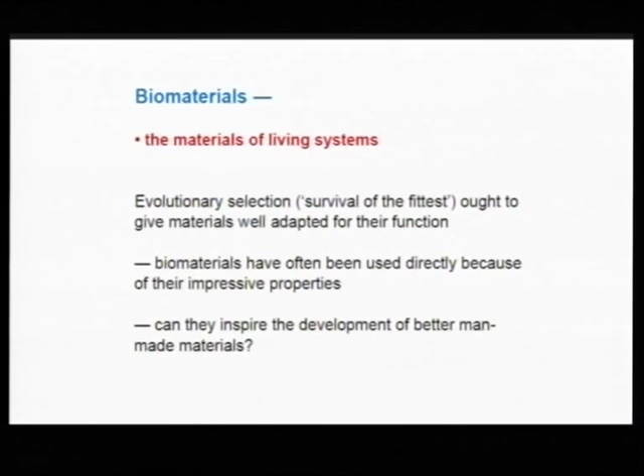As we have progressed, we have tended to move away from those natural materials. You see more man-made materials like steel. But maybe now we're rather moving back to those earlier materials to draw some inspiration from what they had to offer. So we'll see what we can do in this regard.

And we're going to start with a tree. Our problem for you is to think about the tree not as a biological structure, but just as an engineering structure. So imagine you are an engineer and you are given the job of selecting the best structural material from which to make the tree.

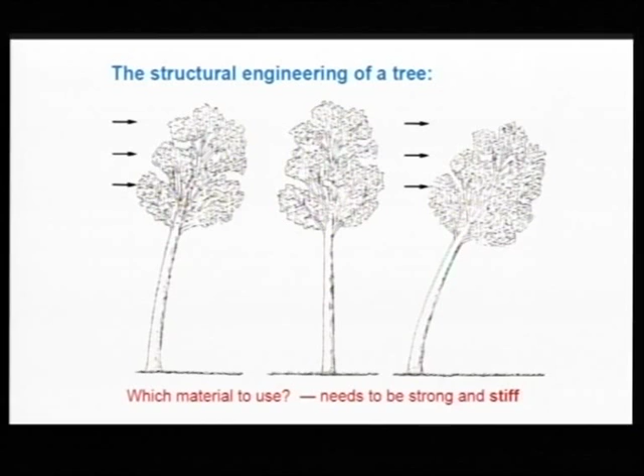You know roughly what you have to do. The tree has to stand up. It must be reasonably stiff to resist moving in the wind. How to choose the best material?

Well, we need some way of measuring the properties of a material. Let us imagine a very simple component, a cylindrical rod. It has some length L. We put some load or force on it to make it longer, and we measure how much it gets longer by this extension delta L.

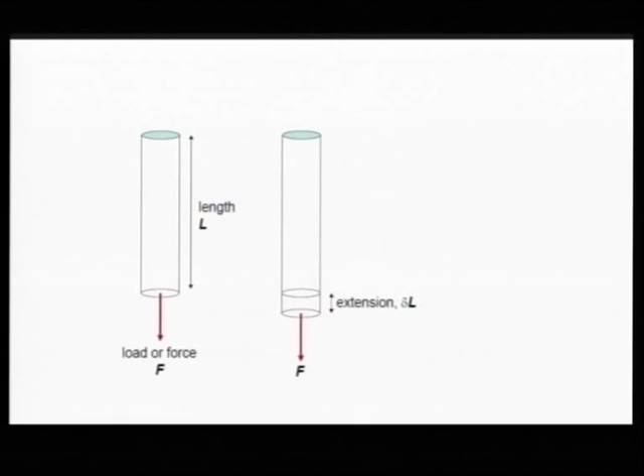You already, of course, know the next point in my argument, which is that F and delta L have a linear relationship with each other. And you can look at the gradient of that line, and that's a property which we could call the stiffness.

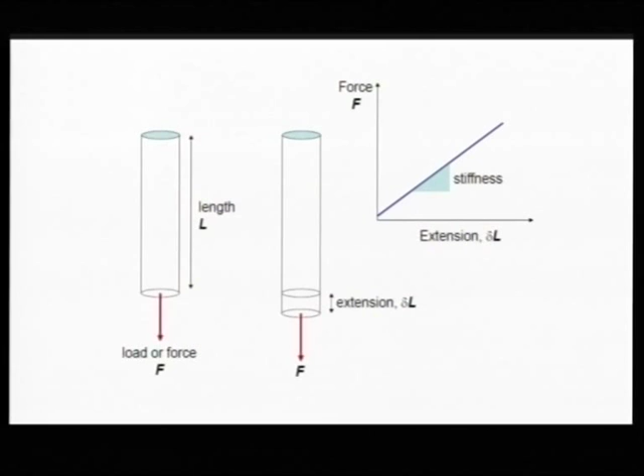But that is not very good for telling us the properties of the material out of which this rod is made, because unfortunately that stiffness depends on the dimensions of the rod itself. If I made the rod twice the diameter, it would be much more stiff. And we don't want to measure that. We want to measure something that depends on the material, not the size and shape of this object.

We note that this is reversible. That's good. We'll be exploiting that elastic property. And here's the point I've been making, that reversible or not, the property we've got is dependent on the size. How to get away from that? Well, it is to change these properties.

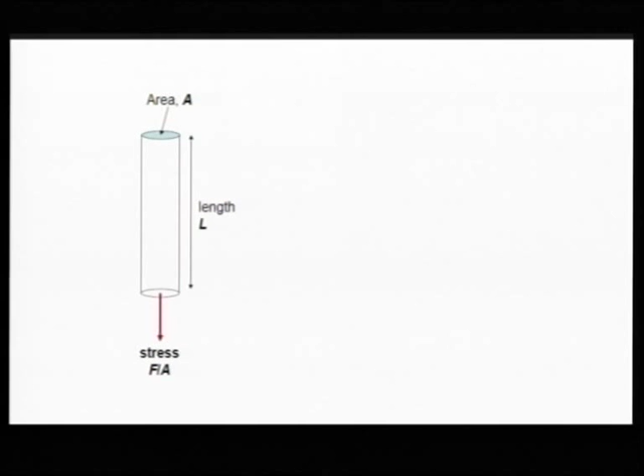So instead of looking just at the load, you divide it by the area to get a property called stress. And instead of extension, you divide the extension by the original length to get a property called strain. And now we plot those against each other.

It's really the same plot as before. We again have a straight line showing that reversible behavior. But now the gradient of that line is a property called the modulus, the Young's modulus E. And that is a property of the material, not of the particular component.

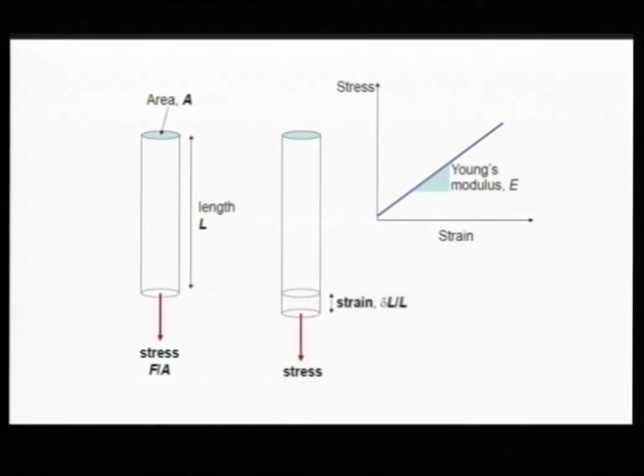So that property E is something we can use to tell us whether a material is better or worse for some function. It's a material property.

Back to our tree. A branch on a tree has the function of holding the leaves out in the sunshine. It must not bend too much under its own weight, and it must not bend too much in the wind. So it must be stiff, it must have a high Young's modulus. And of course, it must not be too heavy to bend under its own weight, so it should have a low density, weight per unit volume.

We can analyze the amount of bending that it would undergo. We need not worry too much about all the mathematics. The point is, if you have a beam, like this yellow object here, with a force on the end, as a result of that force the beam shows a deflection, which is this quantity I've called delta.

We can look at what determines the magnitude of delta. It's this expression, with various parameters of our beam. We'll focus just on delta itself and on this combination of parameters at the end, which is the density of the material, rho, and the Young's modulus E, in this particular ratio, the square of the density over the modulus.

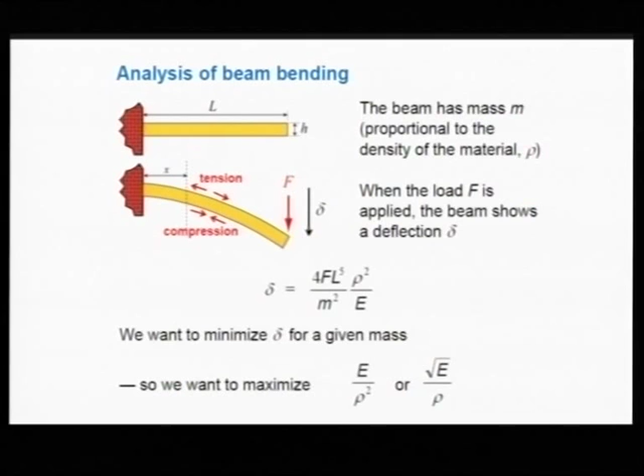So in building our tree, we wish to have this deflection be as small as possible. Delta must be small, which means this combination of parameters must be small. Turning it the other way around, this must be as large as possible. You could express it this way or this way.

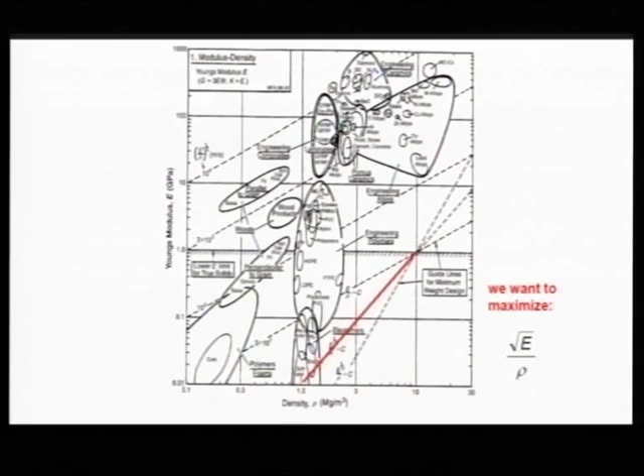Here's what we want - this line is interesting. If we go from this end to this end, our density goes up by a factor of 10, and our modulus goes up by a factor of 100. So in terms of this ratio, E has increased by a factor of 100, the square root is obviously increased by a factor of 10, and the density is increased by a factor of 10. So this is constant - this is a line of constant value of this ratio.

That line is, of all the positions on the diagram, as much towards the bottom and to the right as possible, and that's the worst place to be. So the material it indicates should be the worst possible material to make a tree out of. And that material is, in fact, soft rubber - the material of a rubber band you might use. You can understand that making a tree structurally out of rubber band material would not be very successful.

Here's another very bad material, the metal lead - rather soft, rather heavy, not a good material to make a tree out of. As it happens, steel would be quite a good structural material for a tree. Of course, you know that aeroplanes are not made out of steel, they're mostly aluminium. Aluminium is a little bit better than steel - that red line is a little bit further towards the top left, where we want to be.

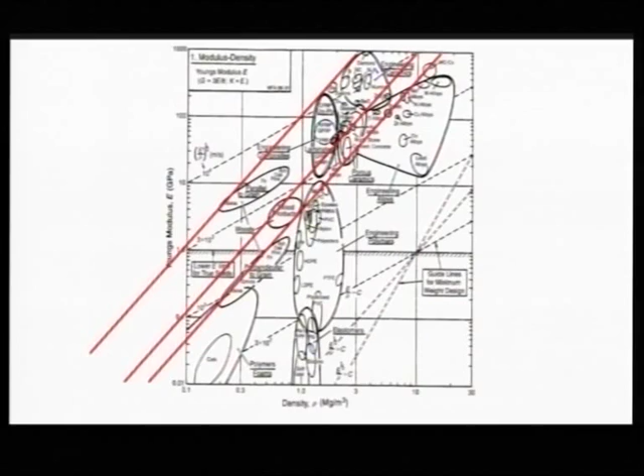But interestingly, of all known engineering materials, the best one is indicated by that line, and I have to tell you that is wood - it's in fact balsa wood here. So it means that if you ignored all the biological functions of the tree and simply asked, what is the best structural material to build a tree? The answer is wood. So nature got there already, and it's one example of evolutionary selection giving us something that's well adapted for its function. Wood is the best material to use.

This idea of evolutionary selection was, of course, made famous by Charles Darwin, who's one of the alumni of my university.

It can obviously have strong effects in other systems as well, but let's look a little bit at wood. It consists of cells, which are cylinders. You might regard them as rather like my pen, but longer in relation to the diameter, and most of them are aligned with the axis of the tree, up and down.

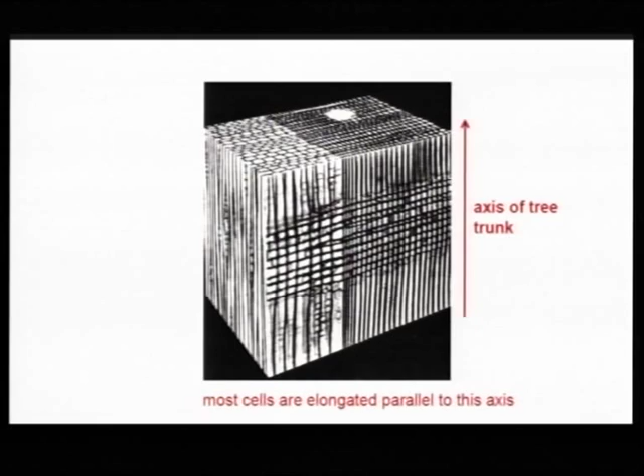But imagine the tree was composed only of cells like this, parallel to each other, with nothing linking them. The tree would be very weak. You could bend it easily and the cells would bend out of shape. So you must hold it together. If this is the main axis of the tree, the radial directions have a set of cells holding the main ones together, and that is these ones.

Here is a cross-section of the tree. The vertical cells are very obvious, and the radial cells are the ones holding things together. Interestingly, if you just look at the surface of this tree, there are no cells parallel to the surface. The vertical ones are there, but not the others. So to split wood that way is extremely easy. It's very weak in that direction.

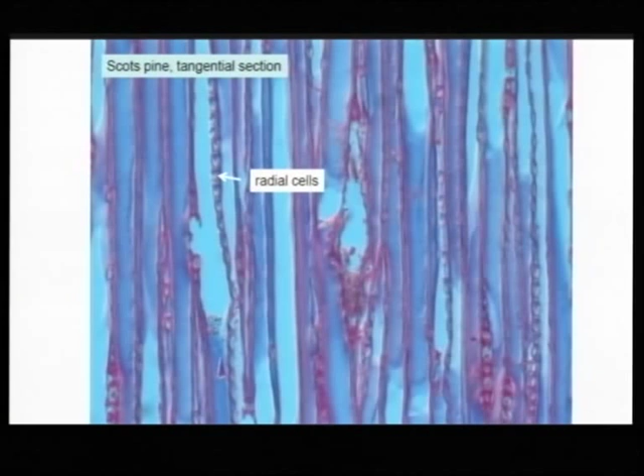This is common wood, Scots pine. These are the cells parallel to the axis. These little things look like peas, but they're actually the ends of the radial cells coming out, holding everything together. It's a wonderful engineering structure.

This is one of the hardest woods known. Greenheart is the name in English. This wood is exceedingly strong, with essentially no free volume in it. It's completely dense. In fact, the overall density of the wood exceeds 1, so this wood will not float in water. It will sink.

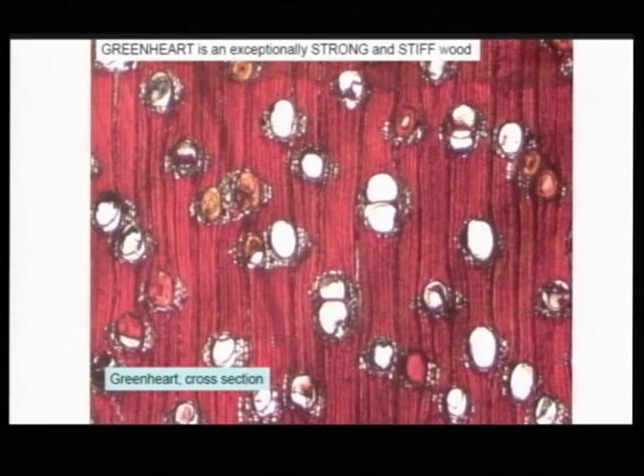Interestingly, it's in the same classification of hardwood that you find the very light material balsa, which is more than 80% air in its dry condition. But it's a wonderful example of a light, stiff material from which we could draw many structural lessons for man-made materials. So back to our idea of people living in caves, maybe 50,000 or more years ago.

Here's a chart again of properties. This is density, factors of 10, strength, factors of 10. But the real point of this chart is to show you the range of available materials. And I mentioned that some of the most interesting materials were natural materials. So we find here wood, shells, antlers of animals, very impressive properties.

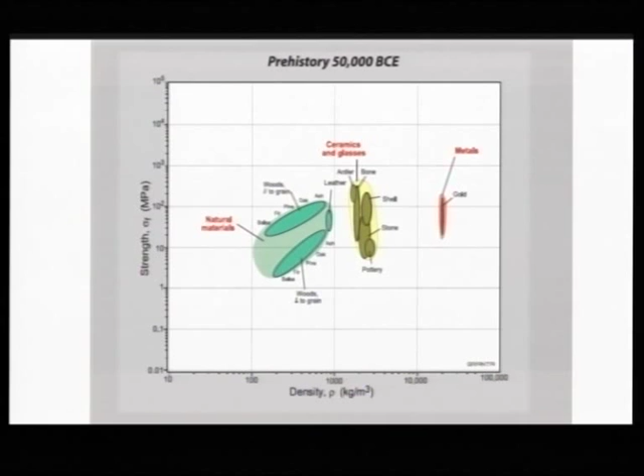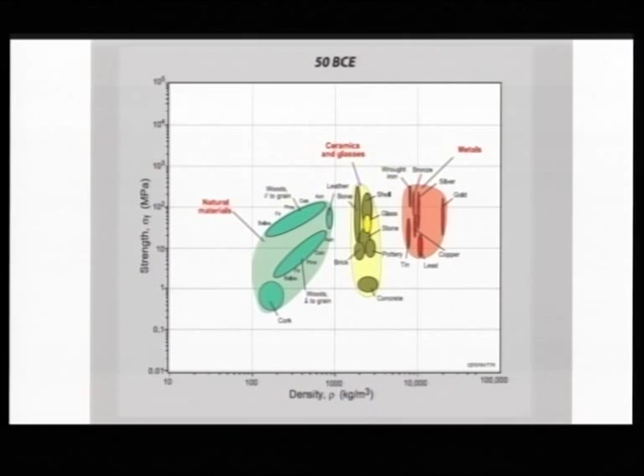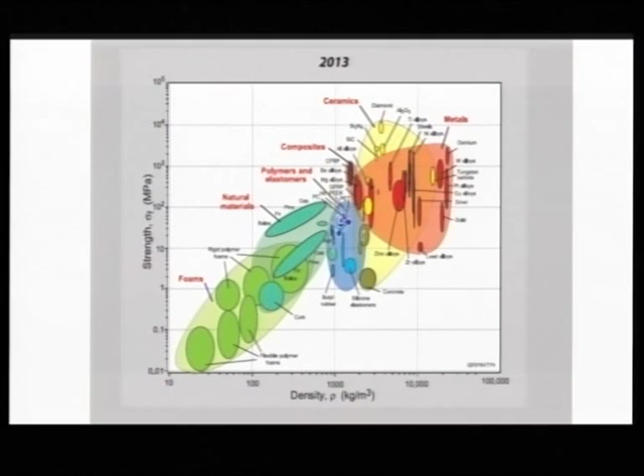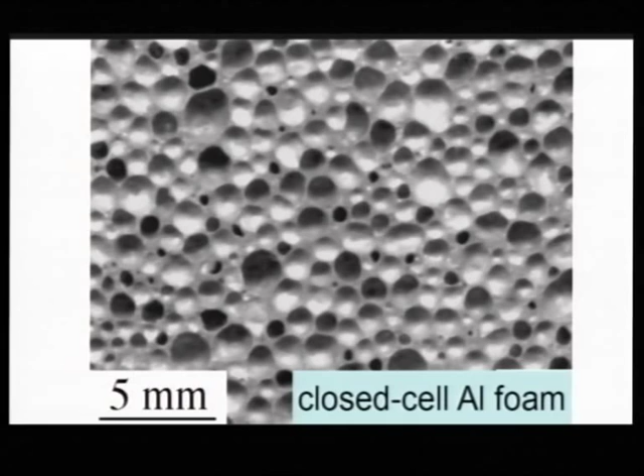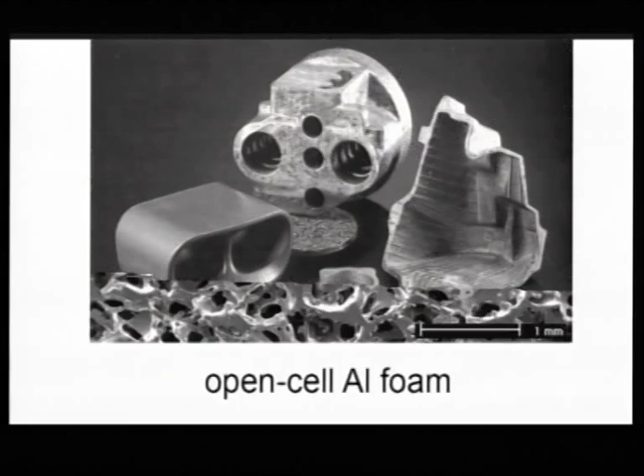So you can develop metal cellular systems. The cells could be so-called closed, with bubbles inside the system, making it low density. Or those bubbles could link with each other, giving you a so-called open cell foam. You could imagine that a liquid could travel through that, so you could use this material as a filter. These are examples of components made from foamed aluminium. They're light, stiff. Here are filters from nickel.

Another point to make about these materials is not just that they provide inspiration in terms of properties like strength and density, but in other ways also. The tree only ever exists in the natural temperature that it finds at the surface of the Earth. It doesn't have any high temperature processing at 2000 Celsius or something. So the energy input to make a tree is minimal compared to the energy input to make a man-made material.

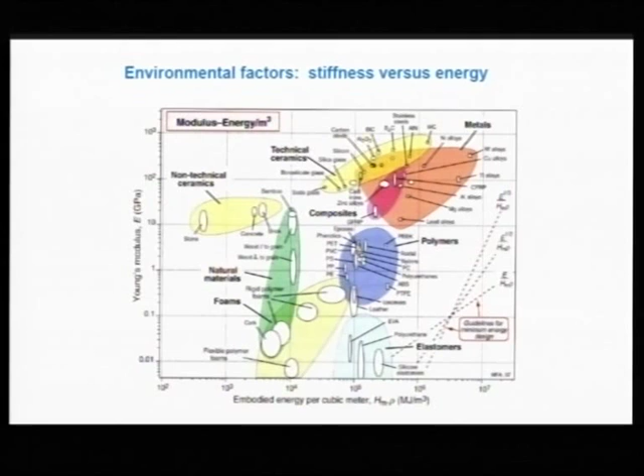This is a chart of one property, namely the stiffness, the Young's modulus of a material, as a function of energy input. For energy input, you could think of how much oil you have to burn to make the material, or how much CO2 is put into the atmosphere. In any case, high energy is a bad thing, and low energy is a good thing. These natural materials, particularly the woods, can deliver very high performance in terms of properties with exceedingly low energy. That's characteristic of the natural materials, with very low energy input as well. So you get performance with low environmental impact.

We'll now turn to a completely different world, the view of the spider, which would like to attract some food in the form of flies. Of course, when the fly comes into the spider's web, from the spider's point of view, it would be a disaster if the web was to break. The web must be strong enough to receive the impact of the fly, so it must be good at absorbing energy.

So we can come back to our chart where we looked at Young's modulus, where we had stress and strain, and there's this linear reversible relationship. The gradient is the modulus, and the modulus is a property of the material. If you stretch the fiber, you put in energy, you do work, you can let it go back to its original length, the work comes back. The amount of energy is the area under the curve. It's this triangle, this pale blue triangle.

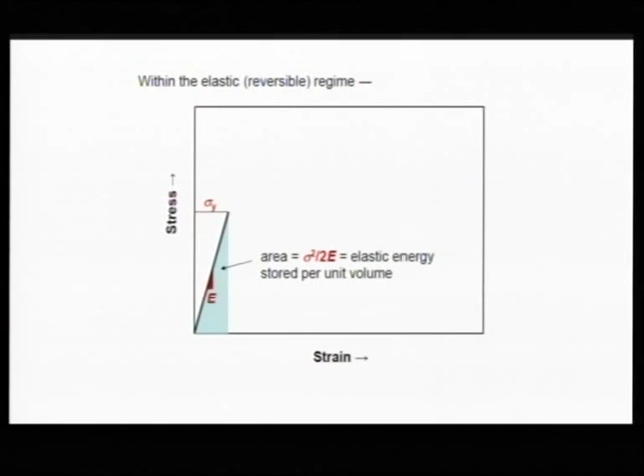And quantitatively, that area is given by this expression. It's the square of the stress you reach divided by twice the modulus. So we know what we have to do if we want, like the spider, to maximize that energy. The first thing is you want to make the fibers stronger so you can stretch them further. So we increase the stress. That obviously increases the area of the triangle and the energy.

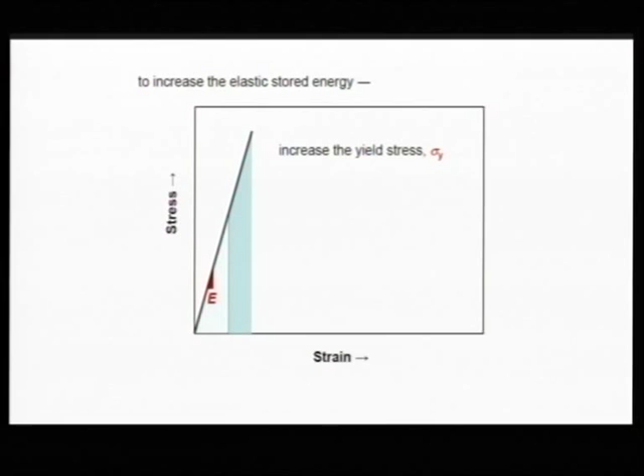The Young's modulus is more difficult. I think if I approached you with a question about a spring and I asked you if the spring is to store more energy, should you choose a material with a high modulus or a low modulus?

Well, the natural answer would be to say high modulus. But actually, what you want is to do the opposite. You want to decrease the modulus, because by lowering the gradient, you of course get a greatly enlarged area, which is the energy. So we know what we want from the point of view of the spider.

Does the spider actually pay attention to this? Well, yes, it does. When the spider makes a web, it has two types of thread in the web. The ones that are radial are those straight lines you see top right. They need to be stiff because you want to hold the web in place. And then the other ones, which form a sort of spiral from the center, are the so-called capture threads. Those are the ones that are going to be used to catch the fly. You don't want those to be stiff. You want those to absorb lots of energy, so you want a low modulus.

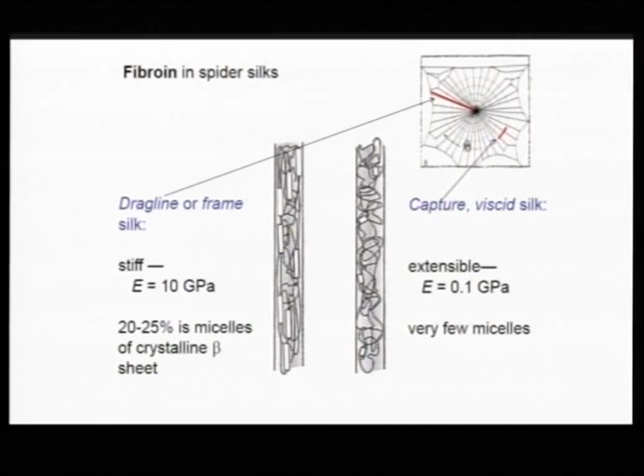And with exactly the same chemistry of all of these threads, the same chemical composition, the spider manages to make threads for the frame that have a modulus of 10 gigapascals, and for the capture lines, a modulus of 0.1 gigapascals. In other words, a factor of 100 difference in the modulus is engineered by the spider for this purpose. It achieves that by allowing the polymers here, the long chains, to be more or less independent of each other, whereas here they're linked into crystalline structures bound locally to make the overall material stiffer.

So here's the web. These are the stiff lines of high modulus, 10 gigapascals, and these are the capture lines of low modulus at 0.1 gigapascals. In fact, if you look at those capture lines up at the top, you'll see that they are not straight. They're hanging under their own weight, so low is the modulus. They're stretching under their own weight.

So, of course, we need to look at one of these charts. We know what we want to store energy. We want a high strength. And we now know that we want a low modulus. So we want, on this chart, to be as far as possible towards the bottom right.

Well, here's a map of all the materials that nature has available. Here's the relevant line of the gradient we have. And by now, you will, of course, not be surprised to find that of all the available materials, nature has chosen the best one. This is, in fact, the silk from a spider's web capture line, which has the best combination of properties of any of the natural materials. It's significantly better than anything else.

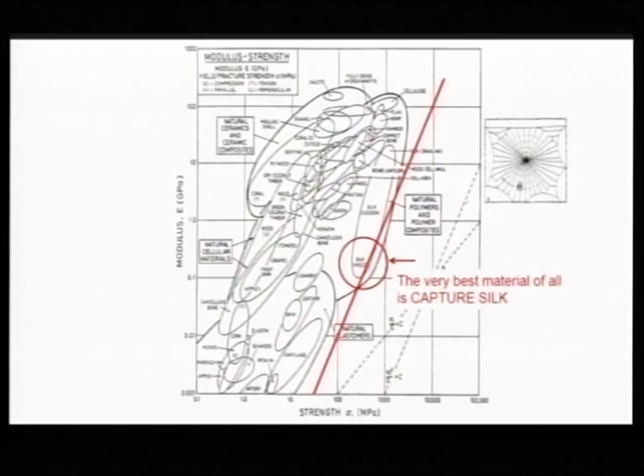We've talked about absorbing energy, but the fly does not wish to provide a sporting or entertainment opportunity for the spider. From the spider's point of view, it would be bad if the fly comes in and then bounces right out of the web like a trampoline. So it's quite important that the web absorbs the energy and does not return it. Well, the spider has sorted out that problem as well.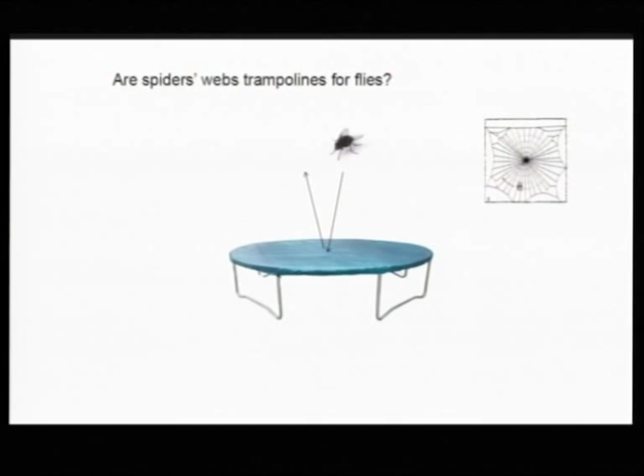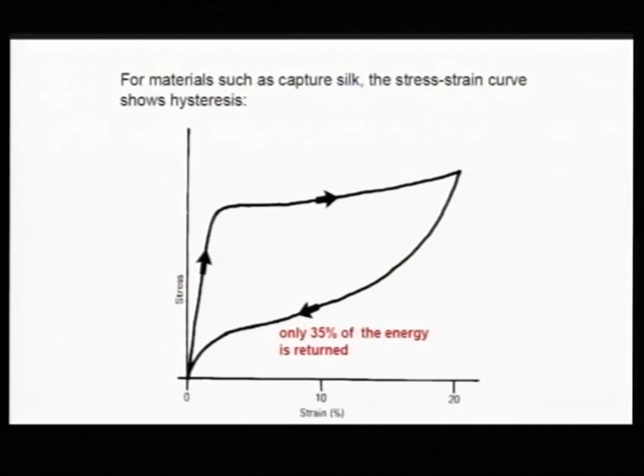Your normal elastic curve is linear and completely reversible. This is not - this is the curve for such a web material. On loading, you follow this curve. Remember, the energy is the area underneath, so there's a big area. On unloading, it follows this other curve, and the area underneath is much smaller - in fact, only about 35%. So it means, yes, the web does return elastically, but it only gives back about a third of the energy.

Two-thirds has been absorbed. It achieves that by changing the structure as we go round this loop. We do go back to the starting condition, but it changes its structure to avoid acting as a trampoline. The structure changes between two forms called beta sheet and alpha helix. We need not worry about the detail, except you can see those two structures look rather different, which says it's not so easy to change from one to the other - which is exactly why the elastic curve has the behavior that it does.

The modulus is controlled by the amount of cross-linking, and that's important in governing the different types of thread in the spider's web. Let me just stay with the comment on spiders' webs for the moment.

If they're extremely good at absorbing energy, you could think of a completely different area of application. Think perhaps of an aircraft carrier, and planes have to land on the carrier, and you need a so-called arrestor cable to stop the plane. The function of that cable is to absorb the energy of the landing plane. So we can ask the question: would the material of spider's web be a good material for these arrestor cables? The answer is yes, it would be rather good.

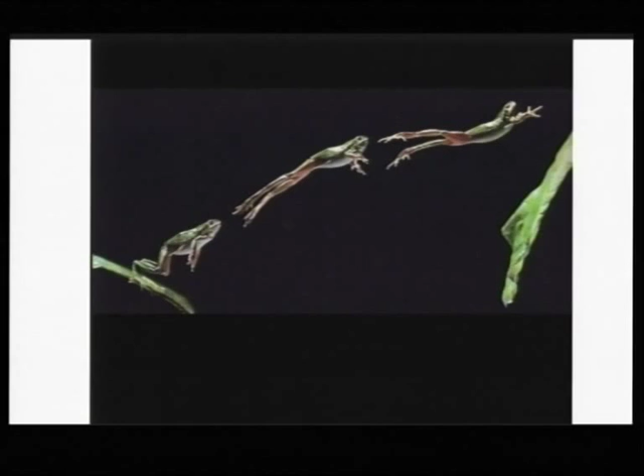Our last topic takes us again to a different world - namely the world of the frog. This particular frog, if you like, carries a Canadian passport. It lives in Canada and is possibly the cleverest frog in the world. It solved a difficult problem, this frog.

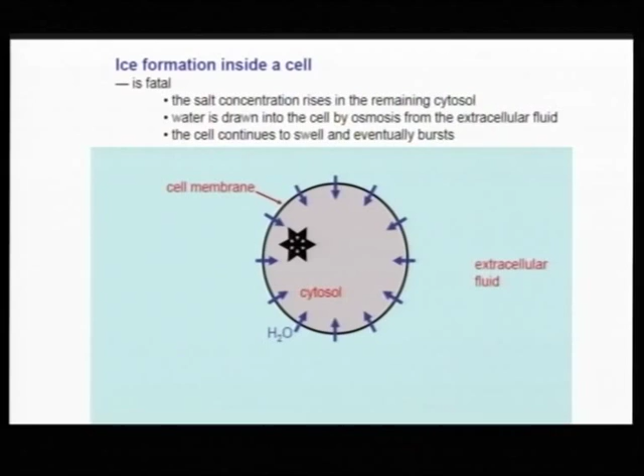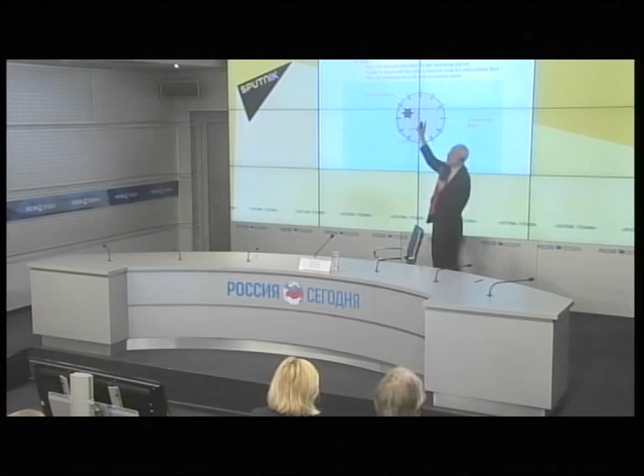Living tissues, plants or animals, do not survive freezing, and the reason is rather simple. You have the living system composed of cells. Here is a schematic of a cell. The cell, of course, is a bag of water with a membrane around it. Inside it is not pure water, it's a salt solution. Imagine that you start to grow some ice inside the cell. Here's the ice crystal - the ice crystal, unlike the liquid, is essentially pure H2O. So the salts in the liquid are now more concentrated than before.

Previously, the liquid inside the cell was in balance with the liquid outside in terms of salt concentration - so-called osmotic balance. But if we now make this salt concentration higher, the osmotic balance is destroyed. The cell will absorb water from the outside by osmosis through the membrane. Of course, drawing in water from the outside simply allows the ice to grow even bigger, which draws in even more water. So the cell will just keep getting bigger and bigger and will eventually rupture the membrane. It will burst, and then the cell is dead - you've destroyed the biological structures.

And for our friend, the frog, this is a difficult problem, because the frog made a very bad life choice - it decided to live north of the Arctic Circle. So in the winter, this frog has no choice. It will freeze - in fact, it freezes completely solid. It cannot avoid the formation of ice. And yet, in the spring, the frog thaws out, the ice becomes water, and the frog hops back to life.

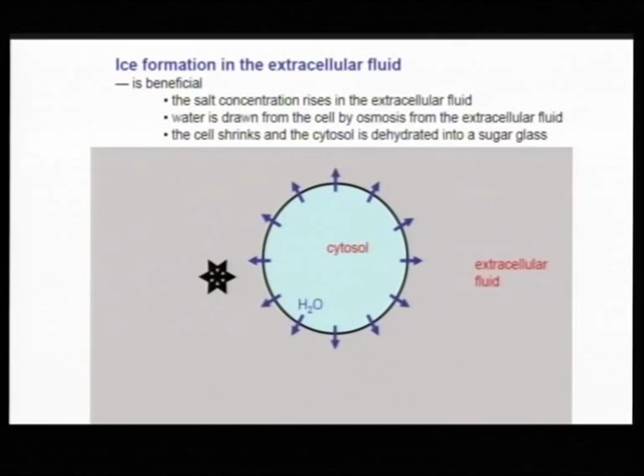And you make the grape more dry. It shrinks and forms a raisin and gradually becomes hard. So what was liquid, more or less, inside the grape becomes a solid. It actually is a solid glass. It's not crystalline—the viscosity gradually increases and you form a glass.

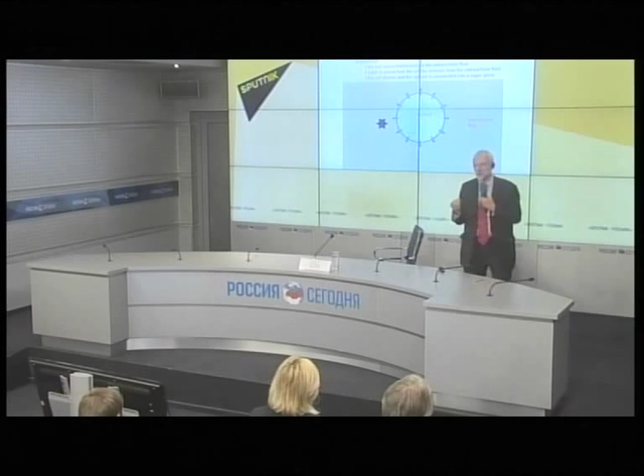In the actual cell of the frog, the water doesn't just have salts in it, it has quite high molecular weight sugars, and it's rather similar to the consistency of this raisin that it would form when it shrinks on drying. Of course, come the spring, this ice turns back to water, the cell absorbs that water, and what doesn't happen easily with a raisin—your raisin goes back to being a grape again. You rehydrate the system. You have not destroyed any of the biological structures, and so the cell, in effect, comes back to life.

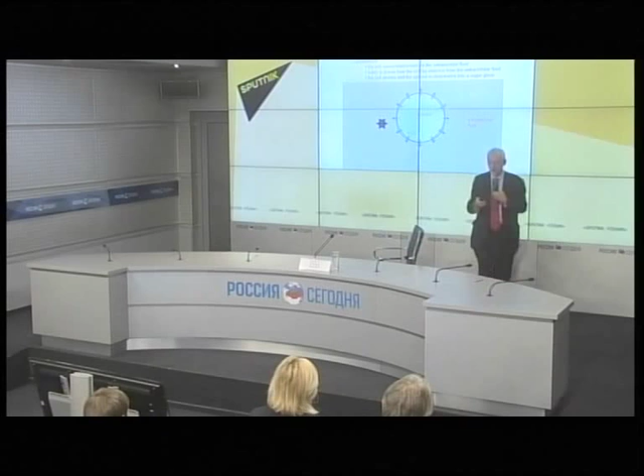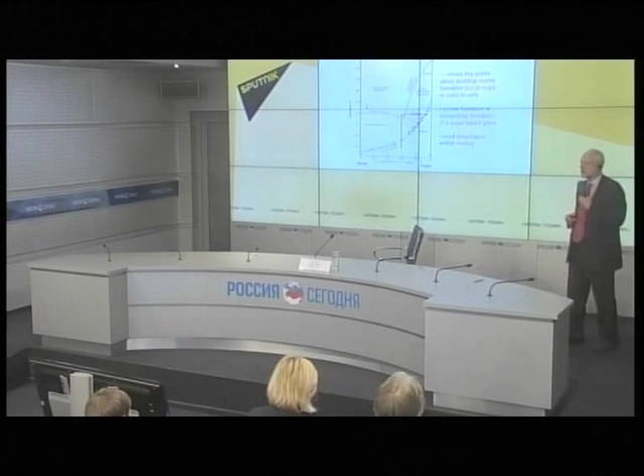We normally think of making a glass by starting with a liquid and cooling it. If there are any metallurgists in the audience, they will recognize a phase diagram. In the diagrams that metals people normally meet, this would be one metal and another metal mixing with each other. In this case, the two things mixing are water and a sugar—in this particular case, sucrose, but in fact it doesn't matter, it could be any type of sugar really.

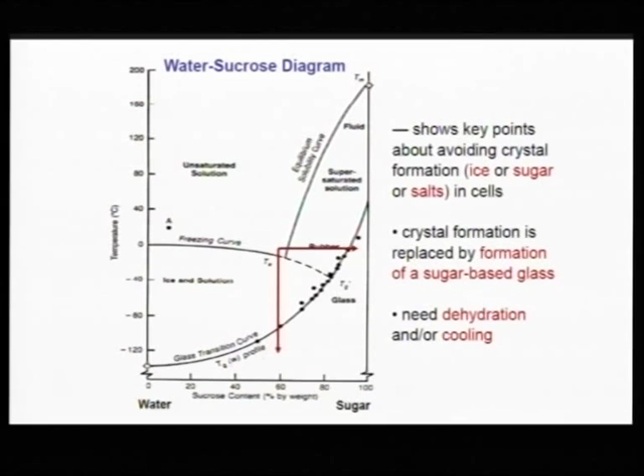The vertical axis is temperature. On the left-hand side, we have pure H2O, which at high enough temperature is water. We cool and it freezes to ice—water cooled, forming ice, that turns out to be easy. On the other side of the diagram would be pure sugar, which at high temperature is liquid sugar, and at low temperature should be crystalline sugar. But that crystallization is rather difficult—in fact, it rarely happens naturally.

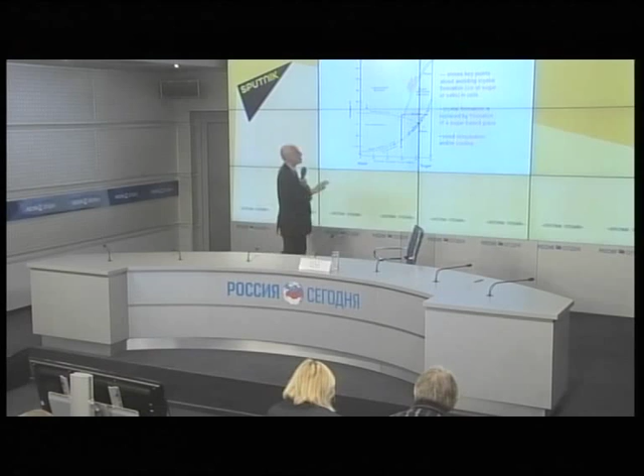The case of interest for the frog is in the middle, because it has a cell solution that's mostly water, but has dissolved sugars. If you were to cool it, it will harden eventually into a glass. But that's not the only way the frog can achieve it—it can achieve it by changing its composition. You take water out, you make the system dry. On this diagram, that means moving to the right, and you cross this so-called glass transition line by a different mechanism, not by changing the temperature, but by changing the degree of hydration. You take water out, you form the glass.

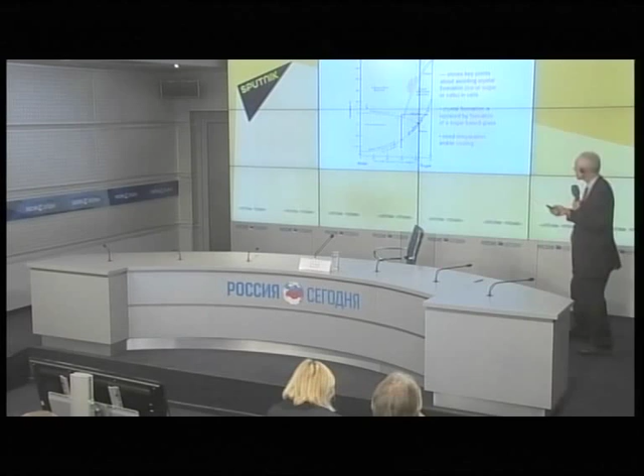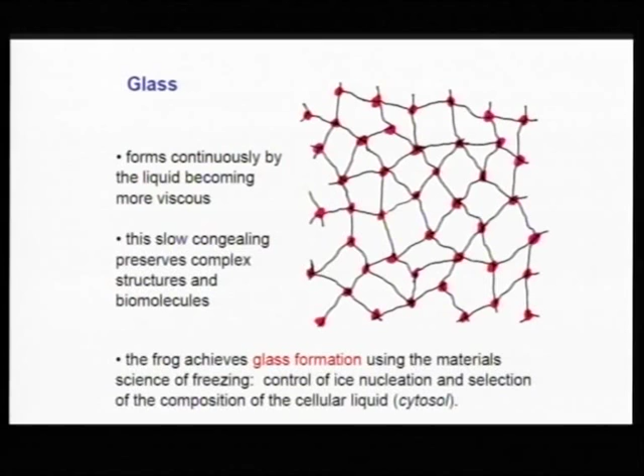Here is an example of a glass. You have a solid structure, but it in some way preserves the arrangement of the liquid. It's formed by gradually becoming more viscous, and definitely not by freezing and forming a distinct crystal structure. If you did form crystals, the cell would be dead.

And in the winter, this frog is 100% solid—it's about 50% ice in the tissue outside the cells, and about 50% of this sugar-based glass. Nothing is happening in the frog, it's dormant. But when you put water back in and it thaws out, it comes back to life. So it's clearly of immense interest in medical science, whether it be preserving organs or something else.

Please do not try any experiments with frogs when you get back home. Firstly, you will have the wrong type of frog, which doesn't have its Canadian passport. And secondly, don't try liquid nitrogen, because it's very important that the freezing is slow—it was to do with osmosis of water through the cell membrane. That takes time. If you were to plunge this frog into liquid nitrogen, I can assure you the frog would not survive.

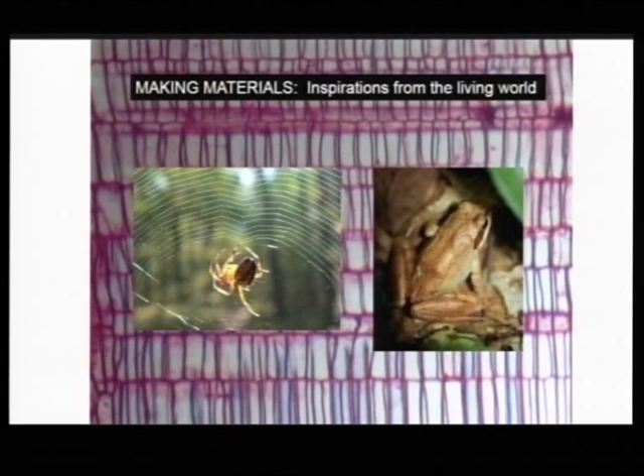So that brings us to the end of our presentation, to say that we've seen an example of a plant tissue, wood, which actually has extremely impressive mechanical properties—so much so that we can regard wood as an extremely important engineering material in its own right. And indeed, it is the major construction material after steel and concrete. It's also a high-tech construction material. And then we've seen examples of the exploitation of elasticity, in this case to provide a nice food source for the spider, but it involves quite a lot of materials engineering, which we could imagine exploiting in various ways.

And the frog takes us from the area of purely structural materials into the area of biomedicine, to say that the way materials change their structure between liquid, crystal, or glass is something that can be exploited in various ways. In this case, for the frog, it's exploited for the rather serious business of survival. So it's obvious why Darwin's selection has come up with an answer to this problem. If it hadn't, we wouldn't have the frog at all. And we can draw other medical lessons from that. So I will close the talk at that point.

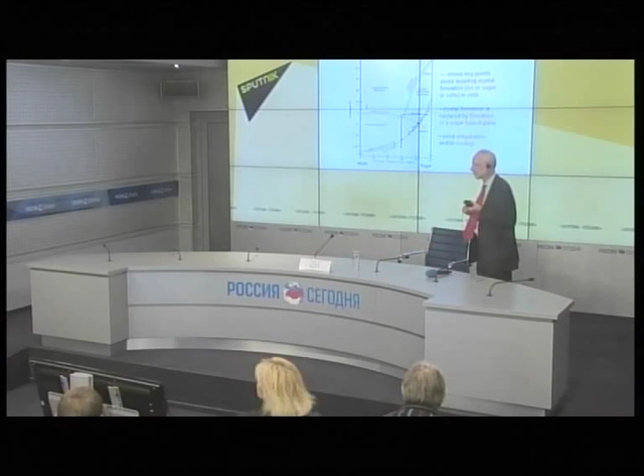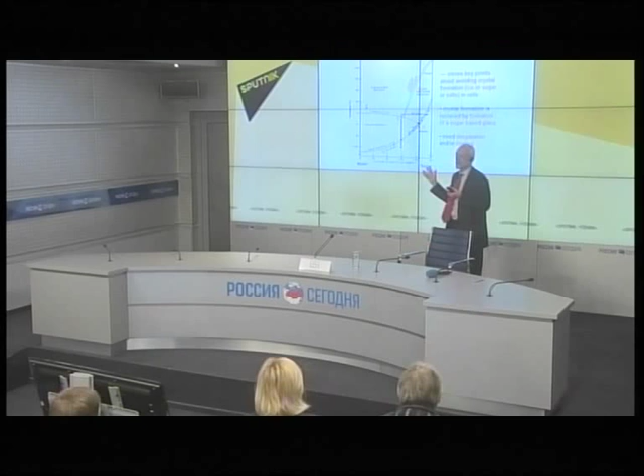Is there any other phase transition between solid and what in water? Did you understand the question? I did understand the question. You are quite correct that this appears to indicate... Professor, could you pick up the microphone, please?

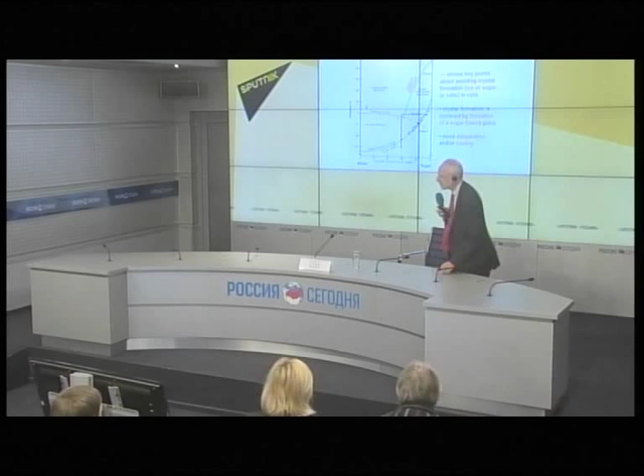This appears to indicate two transitions. The point is that you normally imagine when you cool the water, you form ice, right? And that is what would happen at 0. But imagine you did not form ice, because ice needs a particular nucleation event to trigger it. So imagine that did not happen. Then you would continue to cool the water. In fact, what you would have here would not be ice, it would be water, so-called supercooled water. It's not the equilibrium state of the water, it has a much higher energy. So the water here is, if you like, very unhappy. It wishes to be ice, but it has not managed to become ice. Then if you cool, even without formation of ice, the water will become solid. But it will become solid in a way that preserves the structure of the liquid and is no longer a crystal structure. That is the so-called glass transition.

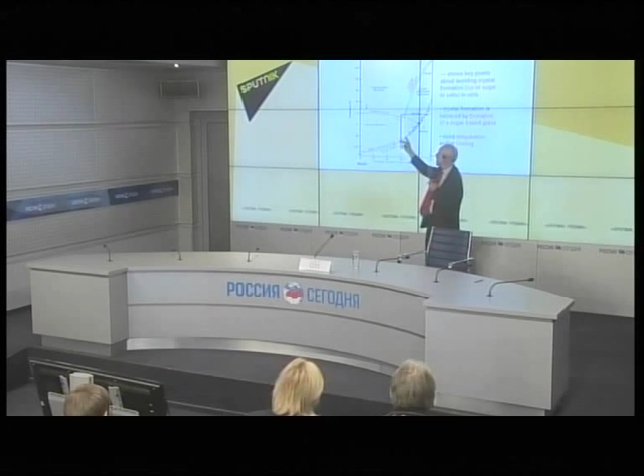Now, it so happens that in this diagram, we have data points for where the transition occurs, and you can see that at this level of sugar, it would occur here, here, here, here. There are no data here. This is, in a way, a hypothetical line suggesting where the glass transition should occur if it was found in pure water. But you are exceedingly unlikely to be able to find it in pure water. Does that answer the question? Yeah, okay.

My question is about the frog. You have said that this is a unique solution, and that means other animals don't have sugars in their cells, right? Are there any other advantages that this frog gets from having sugar in her cells?

It's not a unique solution. We all have sugars in our cells, it only depends how much. I have been emphasizing in this talk that one of the main difficulties for life is how to survive freezing, and that is the principal question of interest for the frog. But I said that the mechanism the frog adopted involves dehydration of the cells.

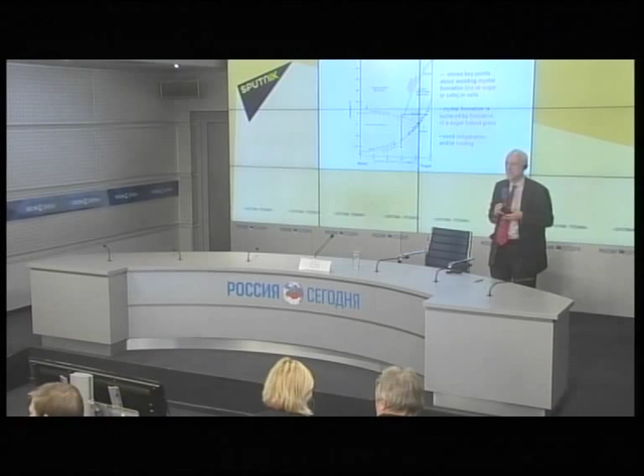I would like to thank you for the lecture. I've got one question. Is it possible to create such biomaterials using modern technologies, and does it make sense to create such materials like spider silk, for example?

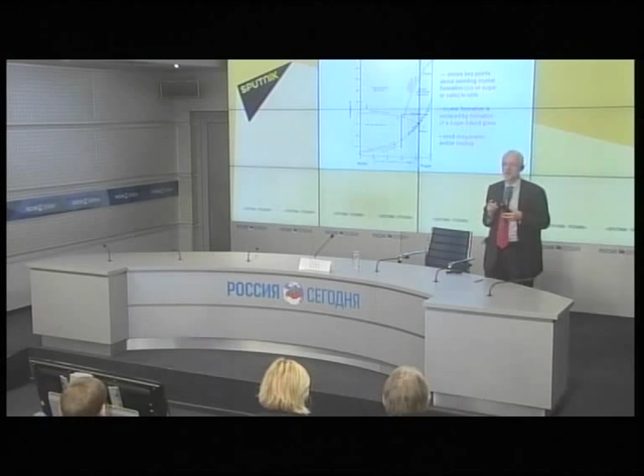It's a very interesting question because of the particular example of spider silk. You could imagine you would rather make the silk that silkworms make, to have an artificial silk. This has been tried from very early days, and we are still very, very bad at it. The spider, or the silkworm, all of these animals are rather better at making these fibers than we are.

But we have a rather clear idea in that case of what we are trying to do. We're trying to manipulate the chemistry and the flow of the liquid to get essentially polymeric molecules correctly designed and aligned. To broaden your question away from fibers, there of course is interest in making materials that draw their inspiration from nature.

One example would be the armor for tanks, for the army, where they must be very resistant for shells coming in to hit the armor. One technology is to make the armor consist of layers, which in a way draws lessons from seashells. For example, mollusk shells can combine layers of rather brittle ceramic with polymeric layers and still achieve, out of those uninteresting materials, a rather interesting composite material with extreme high toughness.

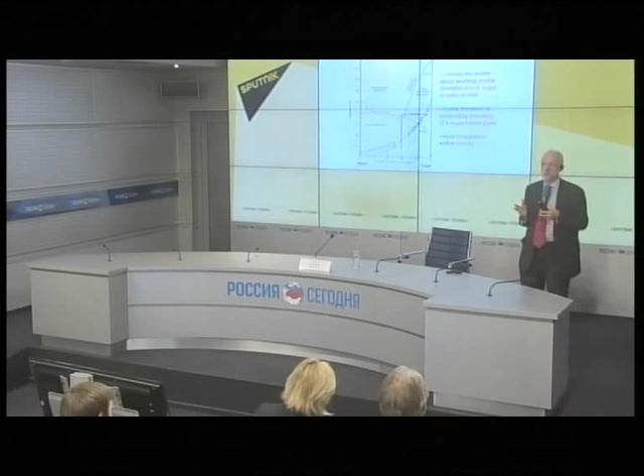Well, I think that everything will evolve rather slowly. You shouldn't imagine an overnight revolution in the materials that we use. The existing materials are used for quite good reasons, and even if you come up with a new material which is better, it's a high risk for industry to change to a new material if they already have one that works well. So we won't see any overnight changes.

But we all know within our own lifetimes we've seen a lot more use for polymeric materials and less for metallic. Those sorts of trends we will certainly see continuing. I think we will see quite a lot of application of biological methods for growing functional materials. When I mentioned battery electrodes a minute ago, I had a particular example in mind of a professor at MIT who's doing exactly that, using genetically modified viruses to grow material relevant for battery technology. It won't necessarily be labeled as such, but it's a way of making the material.

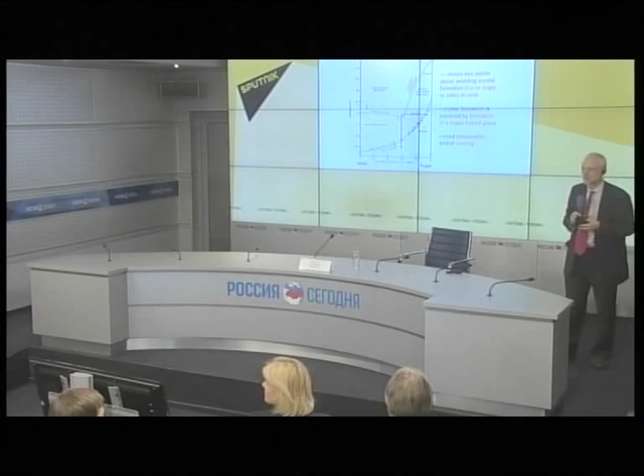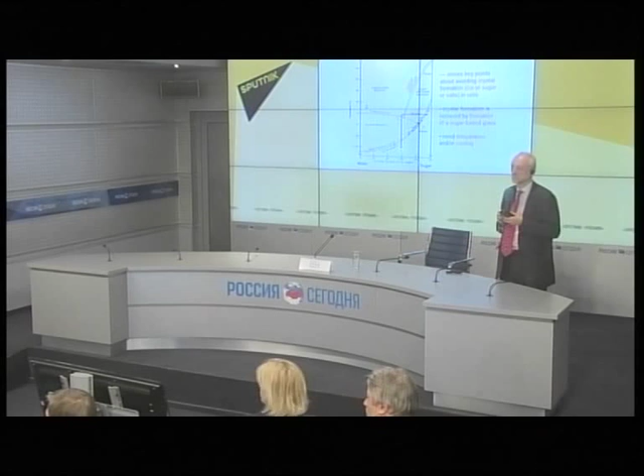I would like to thank you for your lecture too. It was very interesting indeed and quite inspiring. But when you were speaking about spider silk, you highlighted one of the possible drawbacks of this material. You said that if it were used as the arrestor, it would absorb too much energy and just burn and decompose. I think this is quite a common property for all the other examples of materials from the living world, because they are organic or made of carbon. What do you think are the possibilities of creating inorganic and non-carbon materials which would recreate similar structures in the future?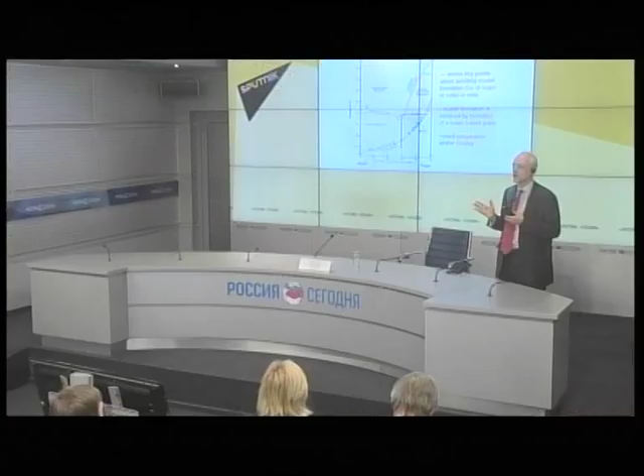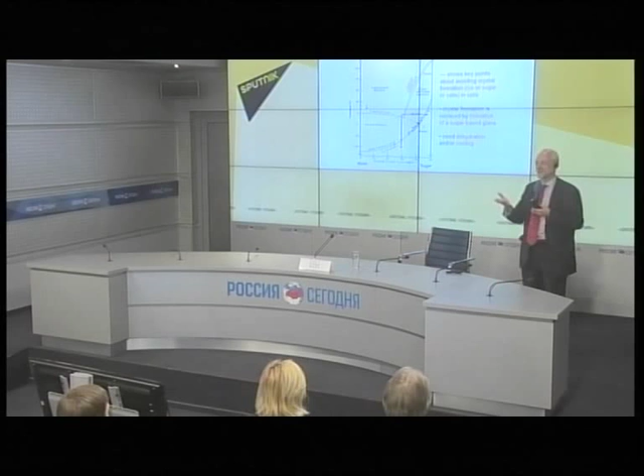Well, it's a very good question. I emphasized the point about biological materials being environmentally friendly because they were made under ambient conditions without high temperatures. But you've highlighted the other aspect, which is that biological materials are exactly designed for operation at ambient temperature. They are not designed for operation at 1,000 Celsius or whatever. So we do need to think of going beyond just the range of materials we have.

We could highlight that nature gives us several examples of excellent control of inorganic structures, as in seashells. Take the shell of various types of mollusk. It's composed of calcium carbonate, but calcium carbonate has many crystal structures, notably calcite and aragonite. The biological system manages to choose which crystal structure to form from identical chemistry - they're all CaCO3 - either aragonite or calcite. Furthermore, it manages to control the crystallographic orientation of these phases.

Furthermore, it manages to package them in thin controlled layers with polymer sheets between. As a result, the hard material of the shell - calcium carbonate, like chalk for writing on a blackboard - has a certain toughness. As the shell on the animal, it has a certain toughness. The toughness on the animal is 3,000 times the toughness of native chalk as a result of this structuring.

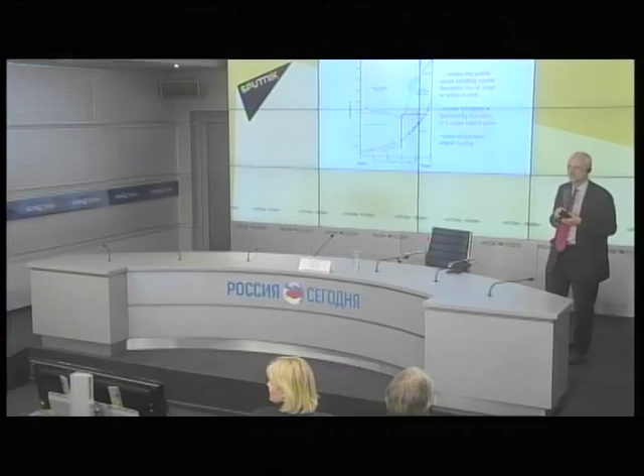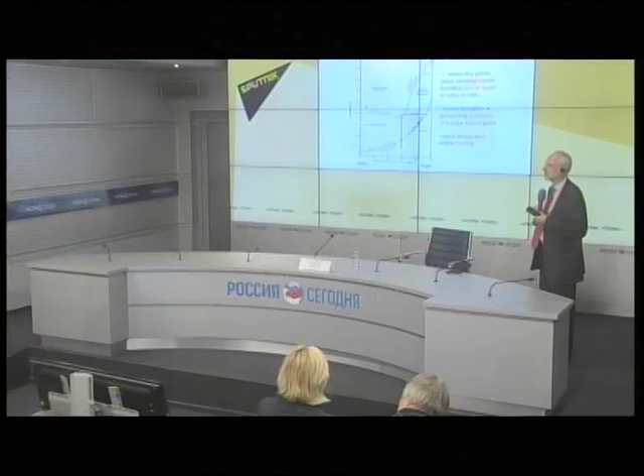I have another question about how these materials are generated. Why doesn't a spider, unlike the fly, get caught in its own web?

The spider, of course, knows the web because it made it, and it walks out along the frame lines, which are nice and stiff. You'll notice that the capture lines are not only so soft that they hang under their own weight, but their weight is increased by little beads of glue on them. So the spider doesn't take any risks. Not only is there a mechanism for absorbing elastic energy when the fly comes in, but there are also these sticky patches so the fly will stick.

The further aspect of the spider's web is interesting. The capture lines have such a low modulus and high strength that you could pull a length of capture line to 3 times its original length and it would not break. So the fly comes in, the capture line becomes much longer, and the fly immediately knows it's in trouble and tries to get out in a hurry, which just tangles it up further. The spider has all the time in the world to wait for the fly to be tangled, then carefully walks out along the nice stiff frame lines that have no glue on them. So it's an unequal competition.